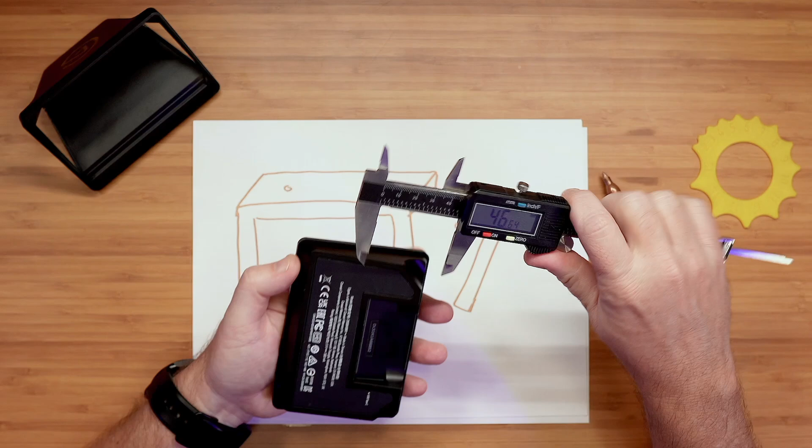So before we get started, I need to measure this thing, and that's why I've got my calipers here. So we'll turn these on and zero them. And I need to find where this little lip is here, these dimensions, right? So from here to here, we're getting about 79.4, 79.3, 79.2, depending on how tight I press the calipers together. So what I do usually when I'm measuring a part like this, if I'm going to print something that this needs to fit directly into, you have to add a little bit of margin, because you don't want it to fit too tightly. So I think I'm going to go 79.5, given that we're reading about 79.3 here. So I want this dimension to be 79.5.

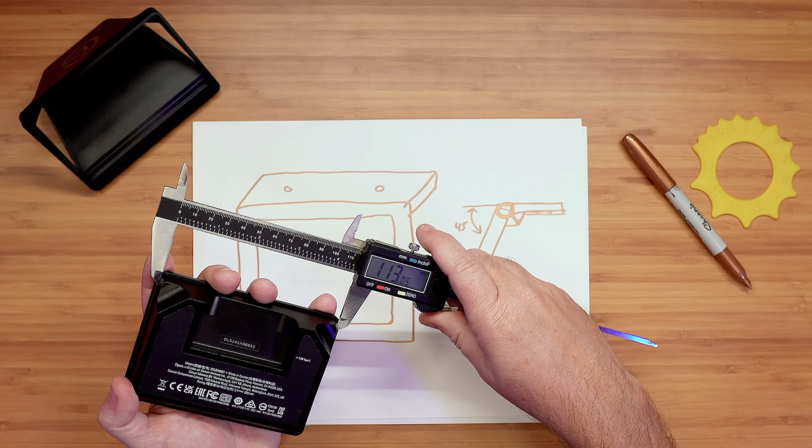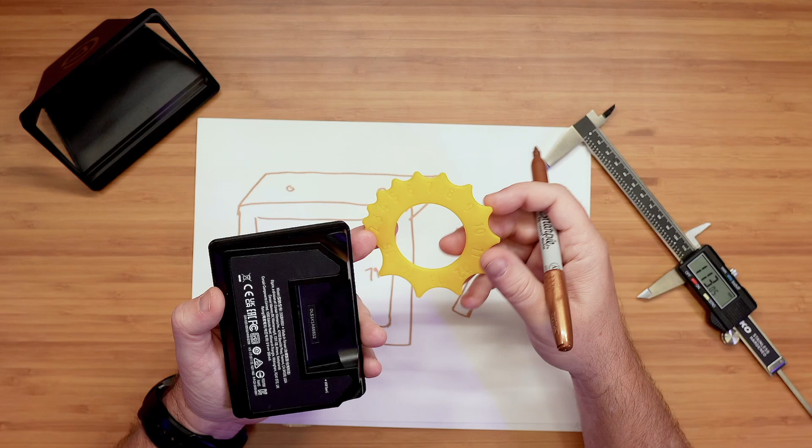And then the longer dimension this way is just over 113. So again, we're going to round that up a bit. So we'll say 113.5 here. So that's good. And then there is a little beveled edge here. I don't know if the camera picks it up or not, but there is a little curve there. And so I've got this little tool. I printed this a long time ago. Actually, if I can find a link to this, I will leave it in the description of the video for you. This has been a super handy little tool for measuring the radius of bevels.

And I'm thinking this one's probably 4. Here, let me get this on camera so you can see. So you line that up, and there's a little bit of a gap there on the 3, and the 5 is definitely too big. So you just fit this in here, and so you can see that this is 4 millimeters. So this bevel here is going to be about 4 millimeters. And just looking at this, is there anything else that we need to measure? I don't think we need to know the thickness of it, because this is just going to fit down into the frame that we're building, so the depth of it doesn't really matter at all.

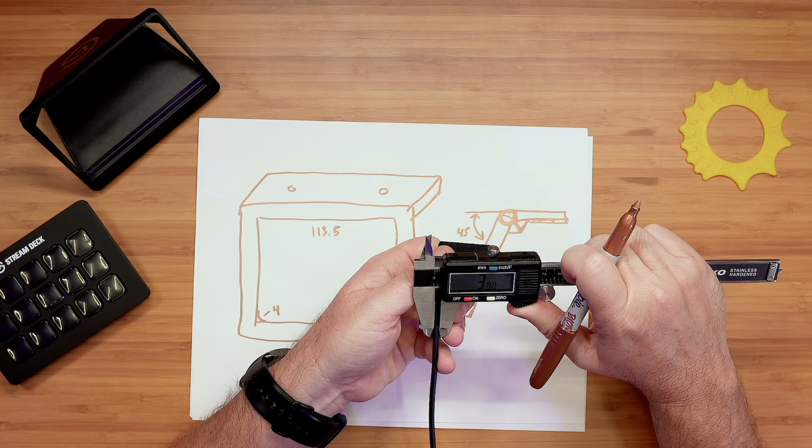I do have the cable. This is the cable here. And you'll see this plugs in here like this, right? And so once that plugs in, this cable comes up right about in the middle from left to right of the Stream Deck. So whatever cable management bracket we create, it should be right in the middle. And just to know, let's see if we can measure the diameter of this cable. So 3.8, so it's about 4 millimeters. So I'll just make a note here that the cable is about 4 millimeters in diameter.

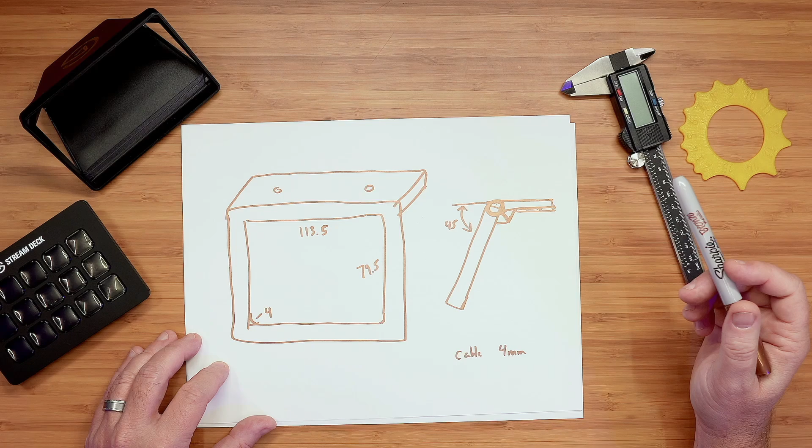All right, so with that information and this very fancy drawing, that is going to be what I start with for modeling this thing in Blender. So I'm going to go fire up Blender. I'll meet you over there in just a second, and we'll figure out how we want to make something that looks kind of like this. See if it works out. Let's do it. All right, so here we are in Blender. I've created a new file. A couple quick notes about my Blender setup here.

First of all, this is vanilla Blender, no add-ons or anything else, except that I am using the ND add-on. So if you've watched other Blender videos here on my channel, you probably know I like to use this particular add-on. It allows you to do a nice non-destructive editing workflow and gives you a bunch of useful tools.

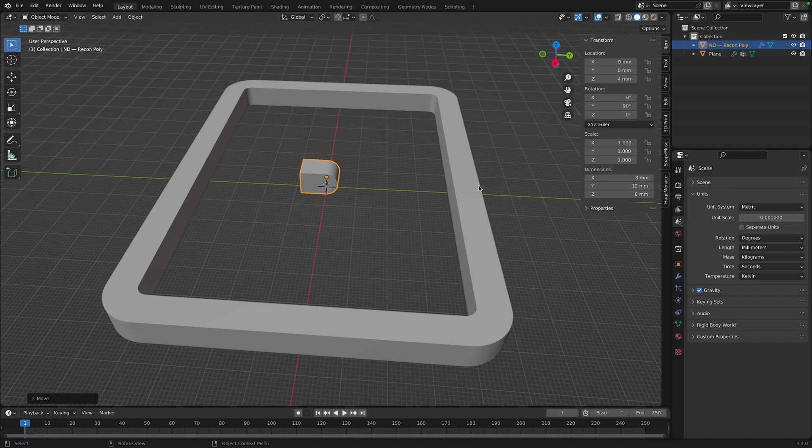And I can just move this up and kind of mate it to the top edge here is the plan. So the way to do that quickly is just move it in the Y and get it past this edge somewhere here. And then I'm going to go up here to my snapping tools, and I'm going to set my snap to be to edges. And then I'm going to move it in the Y again, and I'm going to hold down Control and just lock it to this edge. So now it is perfectly lined up and connected there.

And what I want to do is I'm going to create kind of the opposite of this. Actually, I'll show you. So what we're going to do is we're going to Shift D to duplicate this, make a second copy of it. I'm going to right click and drop it right on top of the copy. So both are sitting there on top of each other. But if I take one of these and I rotate it, which axis do I need? The X axis, yeah, like that. And I go by 180. It'll be like that, right?

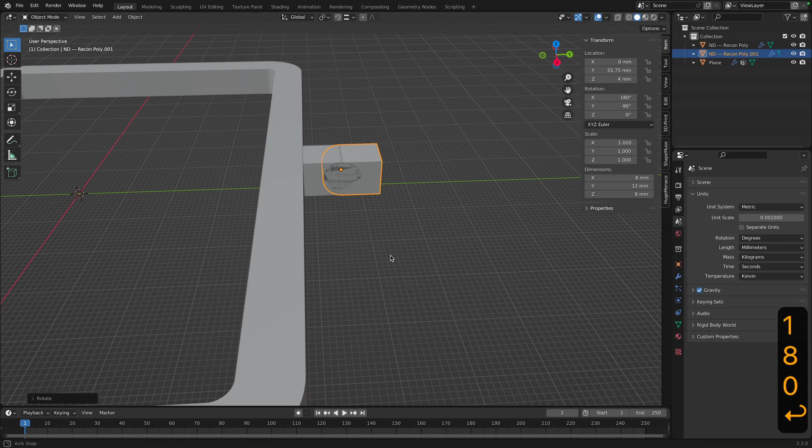So the circular center of this lines up perfectly between those two. So if I cut a hole in one of them, and then I have a rod connected to the other one going through there, and I offset them from each other, that'll make a perfect hinge, right? So what I'm going to do for the moment, though, is hide that one. And we'll just work with this piece for now. And I'm going to want to copy this across here several times so that I can have alternating ones of these facing the opposite directions from each other, alternating all across this top edge.

So I think what I want to do is I want to move this along the x-axis by some amount. Let's say 32. I'm going to go in the negative direction. No, I'm going to go with 40. I'm going with multiples of 8 here because I know that they're 8 millimeters wide and I want them to alternate. Yeah, that actually looks pretty good. So I'm going to start that one there.

And then if I use the array modifier, and I've got to choose the correct axis, I want that one there, and I roll up a few copies, I should be able to get this centered just right with 6 of them, right? That offset listed for the array modifier as well, being 2 right now, means that it's going to leave an exactly 8 millimeter space between each copy here. So it's 8 millimeters wide, then a space of 8, then another one that's 8, and then a space, and so on. And that should be perfect to match up with our opposite side here, right?

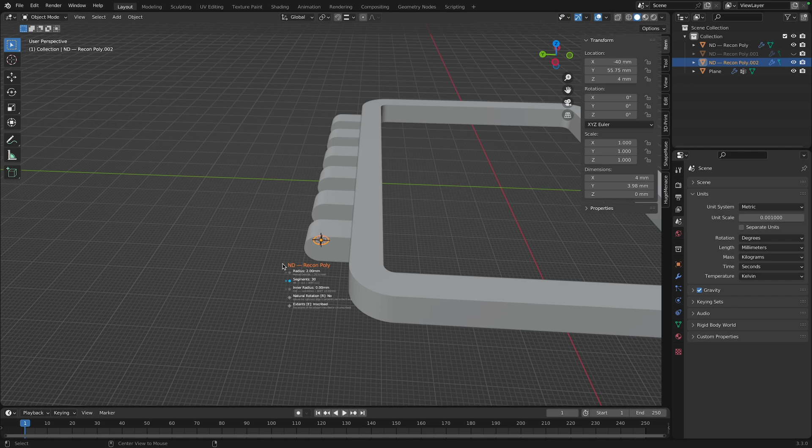And that looks pretty good. It is rotated incorrectly, so we need to rotate it around the y-axis by 90 degrees, which now lines it up right there. And then we will solidify it. And the exact width here doesn't matter. We're just going to use it to cut a hole out of this piece. And so just as long as it's wider than this piece is, that'll be fine.

Now, before we cut this hole, this is going to be a hole that our rod is going to run through. And we want to make sure that the hole is slightly bigger than the rod that's going to run through it. Otherwise, everything will fuse together when we print this in place. And so I made this thing 2 millimeters in radius, 4 diameter, but that's not going to be big enough. If I want the rod to be that size, I need to make the hole a little bit bigger.

So I'm going to go back into the Recon Poly settings here, and I'm going to change this radius from 2 to like 2.2, so that I'll have a 0.2 millimeter gap between the hole and the rod here once I get this thing all finished. That should give me enough clearance for the print in place hinge to not fuse together, and it should work just fine. So we'll give that a try.

I'm going to shift select this, and I'm going to difference this out and then hide this wireframe. So you'll see here we got a hole in this piece, but all the rest of them don't have the hole in them. And that's just an issue of the modifiers in our modifier stack not being in the correct order. So we've got the array here, and then the difference came after that. So if I grab this and I drag it up here and put it before the array, then you'll see all the copies get the hole as well. And that is what we wanted. Cool. So that looks good.

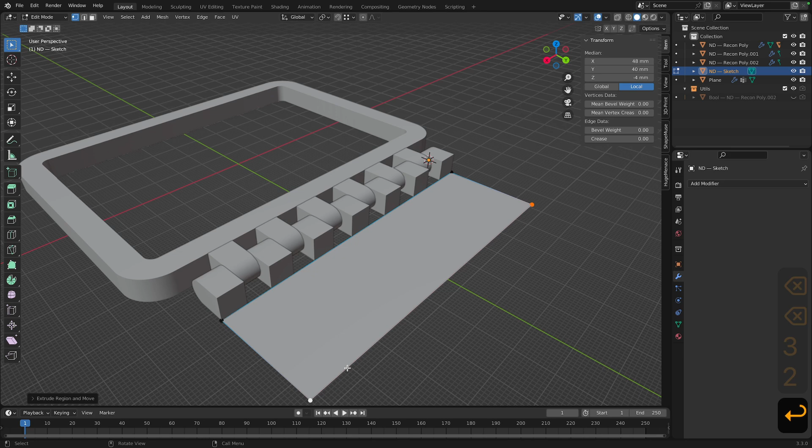All right, and then with that shape, we can solidify it by 8, fix the weighting so that it is lined up with everything else. And that is going to be our under desk mounting plate, right?

Okay, next, these little spaces here are a little bit annoying. Like, they're fine, but I would like to tighten that up just a little bit. And so how am I going to do that? I have an idea. All right, let's create another single vertex, move it, and lock it right there to that point. Then I'm going to change my snapping to edge, and I'm going to move this vertex along the y-axis and lock it to that edge.

Good. Now I'm going to extrude along the X, and I'm going to lock it to this edge. Yep. And then let's look straight from the side. Change this back to vertex, and I'm going to make sure I have both of those vertices selected. This would be easier if I just turned on X-ray mode there. Okay, cool. So we'll look straight from the side, there we go, and extrude those in the Y direction this way, and I'm going to try to lock them to the point, kind of the apex of this curve, right?

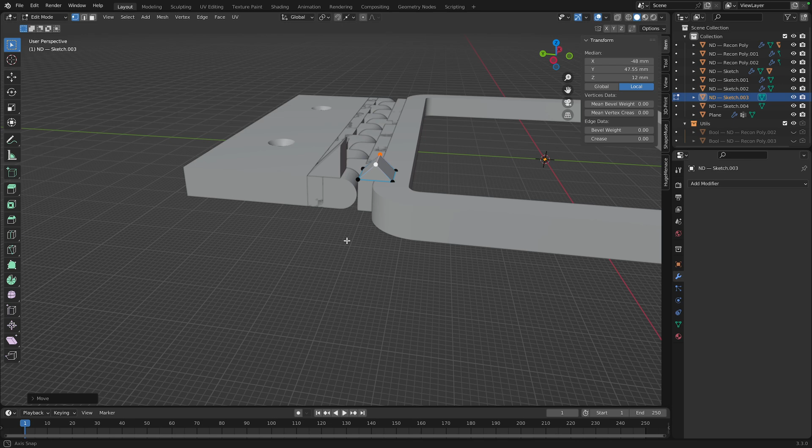All right, that was confusing for me to explain and probably confusing for you to understand on the video here. But the idea is now that as we rotate this piece up, this will come down and will perfectly meet with that and should cause this to sit at a 45-degree angle. That is my thinking there. And so now that we have that, we can go ahead and use our array modifier, picking the correct axis. It's that one. Nope. Not that one either. There we go. And we can put that out along there.

And we can see that the spacing isn't quite right because we have to change the offset to 2.05, just like we did with the other things, and then that should line up perfectly. Yeah, that looks good. And then we'll do the same thing there with this one. So that many, and we'll say 2.05. And that looks good.

But I said I wanted to create some sort of a cable management solution for the middle here. And so I don't think I want these stops in the middle. I think I'd like 3 and then a gap and then 3. So to do that, I'm going to go to here and just do the 3. Same with this one. We'll go back to our array modifier and roll that down so it's just 3. And then because on these objects their origin is the center of the world over here, I should just be able to say mirror, like so. Nice. And then I've got the 3 on either side that I wanted with a gap in the middle.

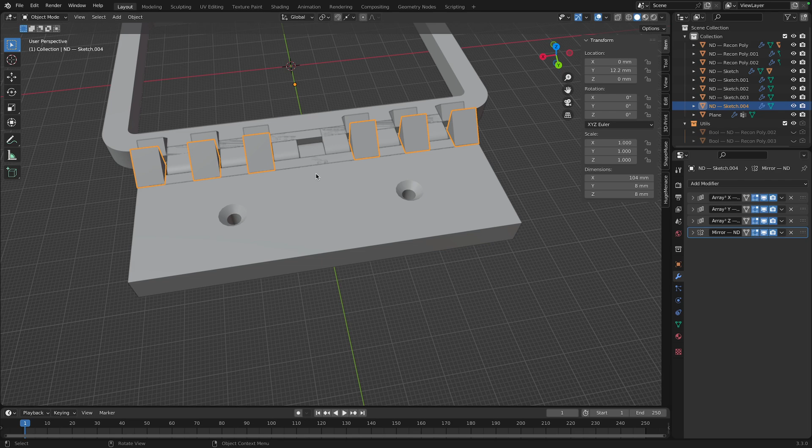So let's make a little channel here, I think, that I'm just going to press fit the cable down into. And we know that that cable was 4 millimeters in diameter. And so we will come back here to our world origin and create a circle that is 2 millimeter radius because it needed to be a 4 millimeter diameter. And we will give it 16 segments. Seems fine. And then I'm going to have to create some kind of a profile that's similar to that mailbox type shape that we created before, I think.

Yeah, let's do that. So we'll go ahead and apply this modifier and tab into here and grab the bottom half of these points and delete them and grab these and extrude them in the Y by 2, like that. Yeah, that seems fine. So here's the idea. Let's grab these 2 again, extrude them. That was not what I wanted to do. Undo that. Extrude them in the Y by another, is 1 too much? Yeah, 1's probably too much. 0.5, cool. And then we'll move this one in the X by 0.5, and we'll move this one in the X by 0.5 negative. So what I'm doing is I'm creating this little kind of overhang that's going to, I think, help to lock the cable in place.

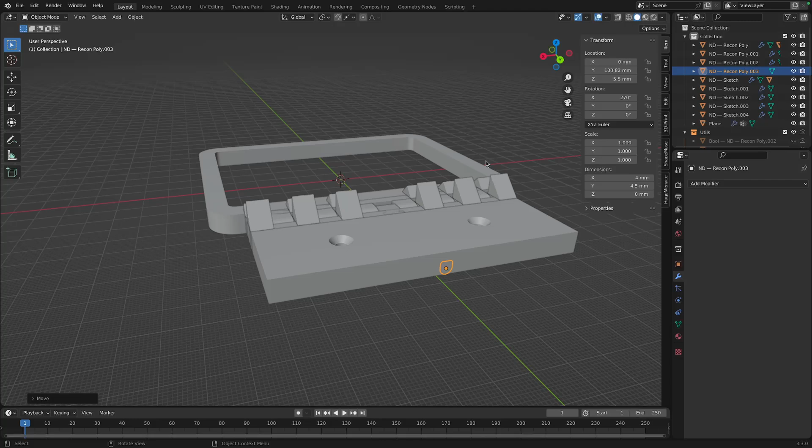And then I'm going to move it in the Y this way, right? And then I'm going to move it again in the Y and lock it to this face. And then I'm going to extrude it. Not extrude it, I'm going to solidify it like so. Only in that direction. I'm going to go, I don't know, to about there. What is that? 29? Let's go 30, 32 would be the full width of that thing. Let's go 28.

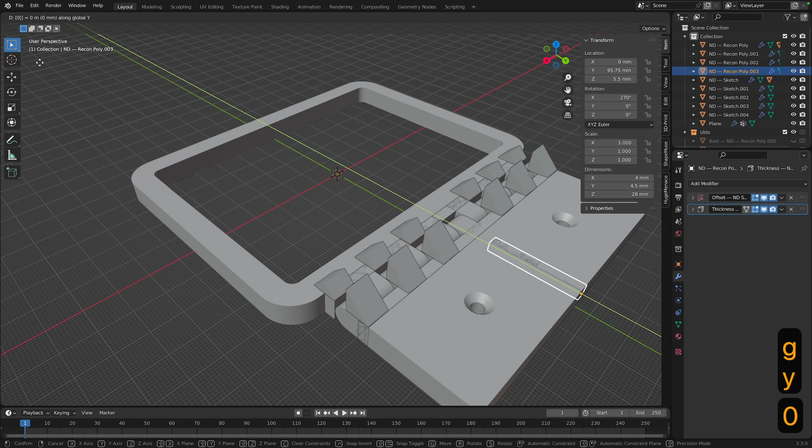Yeah, that seems good. And then I'm going to move it in the Y by 0.1 just so it's hanging over the edge here just a touch. And I'm also likewise going to move it in the Z by 0.1 so it's sticking out the top just a touch. And then I'm going to shift select that and I'm going to difference it out.

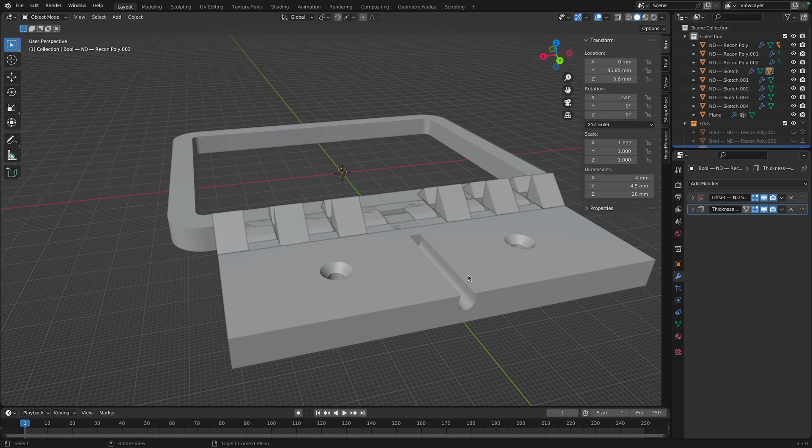So all of that work to create this little channel, which is the correct width for our cable, with this tiny little overhang at the top here that should allow us to kind of press that into place, and it will stay nicely snug in there once we're done. That's the idea, at least. And with that, I think I'm happy with this part.

Yeah, seems good. Now we're going to export this, and some people have asked me how do you export, because this is a bunch of different objects here in Blender, right? You can see over here in our tree, we've got 8 or so different objects. Do you have to union them together or that sort of thing is the question that I get a lot when you're exporting this as an STL. And the answer is no, you don't.

So if we go over here to File, Export, and we try to export as an STL, you'll see that one of the things that comes up is this. We've got some controls over here when we try to export. So selection only is a checkbox that I almost always have selected when I export, and then apply modifiers. So if we say apply modifiers, it will apply all of the things that we did in ND. And then if you have multiple objects that you're exporting, it will automatically fuse them together into a single STL when it does the export as well.

And so the reason that we want to do selection only, though, is we've got these hidden utility objects over here that were our cutouts for our screw holes and stuff like that. You don't want to be exporting those objects because that will plug those holes. And so we want to hit A to select everything that's visible here. And then we do our File, Export as an STL, and we make sure that selection only is checked and that apply modifiers is checked. And now we will get a single object that is everything we have selected here.

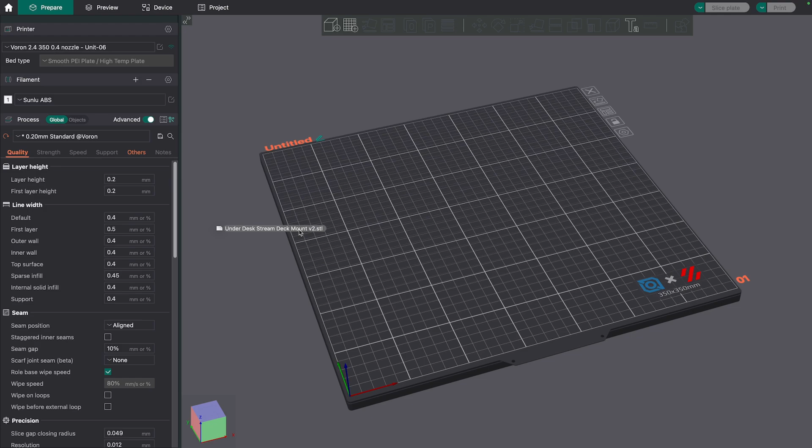And I'm just going to grab the file that we exported from Blender and drag it into here. So there is our Stream Deck mount. And it's obviously oriented correctly because we designed it that way in Blender. We designed it to lay flat like that. And so I don't think that there's any settings I need to change. I'm just going to hit Slice Plate.

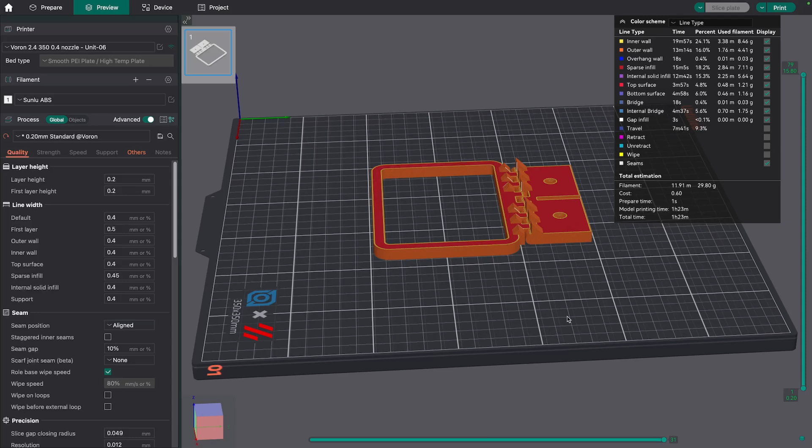And we're going to go in here and double check just to make sure that this thing looks like it's going to print correctly, especially in this hinge section, right? Because we care about the clearances in there. So I'm going to pull this down a bit. We'll go all the way down to the very bottom layers and take a look here just to make sure we have enough gap here.

We have like one extrusion width gap between these parts of the hinge down there, which should be enough. Yeah. And then as we go up, we're still good here. All right, so here's the base right here. This red part is what I'm looking at. So that's the flat part of the bottom of this piece of the hinge. Then we've got a one layer gap, and then I went too far.

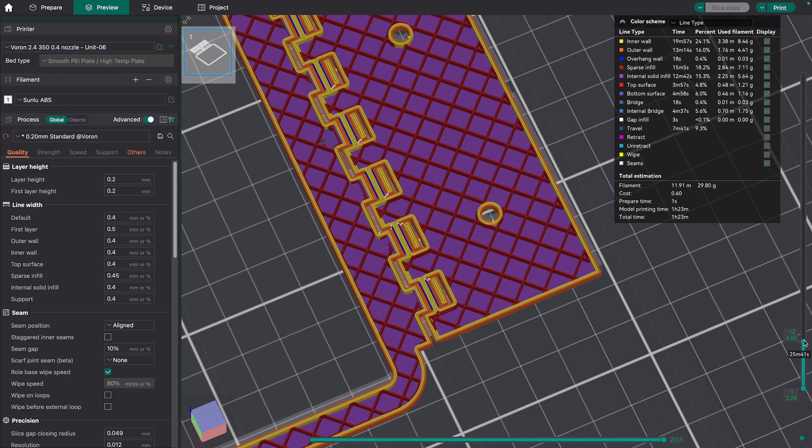This one right here is our first bridge layer for the peg that's going to be in between. So there is, again, a 1 layer gap before we put that peg in place. These look like they have a decent gap around there. And then we go up to the top here. There's the top of our pin right there. We've got 1 extra layer, and then we're bridging across the top for that. And so again, we have a 1 layer gap, and then we fill it up.

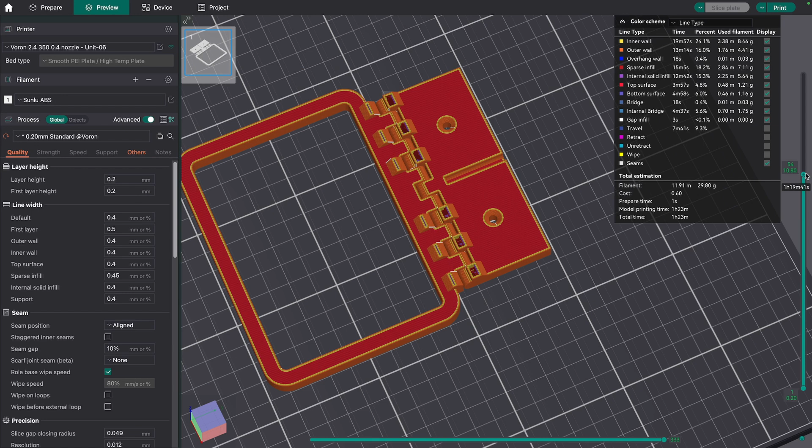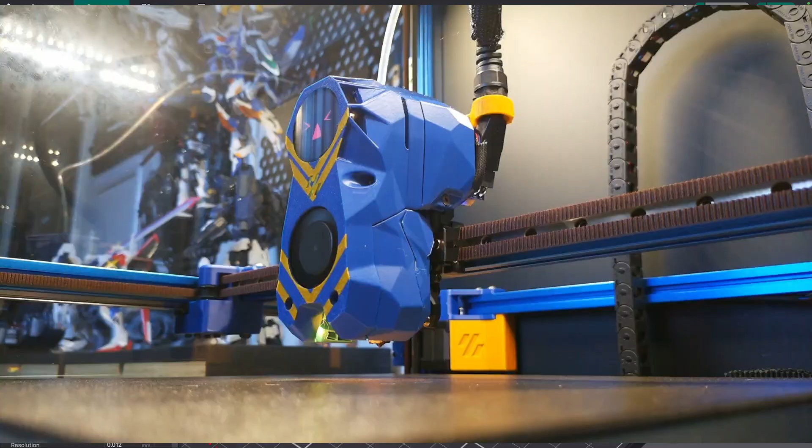Okay, so I am happy with that. I think it's gonna print okay. And it's gonna print in about 1.5 hours. So I'm gonna go ahead and send that over to the printer, let that thing print, and then we'll come back and take a look at it when it's done printing and see if everything fits and hinges correctly and sits at the right angle and all of those details. We'll see if that came out correct.

All right, here we are, moment of truth. I've just taken this part off of the printer. So here we are. This was the bed side, of course, and then this was the part that was facing up. And we've got our hinge here, and with any luck, I should be able to, it's a little bit tight, but yeah, I can get this moving and just kind of flex it a bit to loosen it up. Yeah, that looks really good.

Okay, so this is our angle. This is where our stops cause our angle to stop. So that's just about what I had in mind. Excellent. The rest of it's nice and solid. I'm not concerned at all about this falling apart or causing the Stream Deck to fall off of my desk. So that's good. Here are 2 screw holes for mounting up underneath the desk, and those are looking good. We'll try out this cable channel here in just a minute for the USB cable.

But first of all, let's see if this thing fits in here. So, yeah, it popped in there quite nicely. It's a good snug fit. Yeah, in fact, I can shake this and it's not coming out at all. So that's really excellent. And it looks good from the front too here with the textured frame around the outside. Yeah, that's gonna look nice. Awesome. All right, and I said we'd try the cable, so let's do that as well.

I've got the cable right over here. So I'm not gonna plug it in right now, we'll just try. So it'll be plugged in like so, and then we should be able to just kind of press this down into this channel. That was the idea. Yeah, that works actually quite well as well. It's not coming loose. So that sizing was good. And that'll keep the cable from hanging down below the desk and hitting me in the knees and that sort of thing. So that'll be nice too.